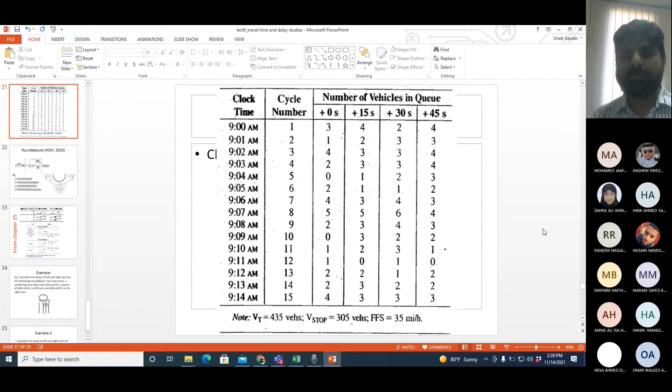Now we will move to the topic which we were covering, which was delay studies. Okay, so we discussed the procedure and the equations for doing a delay study on a traffic signal. I showed you the equations and the procedure. Today we will do some examples and I will show you the procedure for calculating delay for roundabouts as well.

So you see this is an example, data taken from a delay study of a signal. So the study started at 5 p.m. and it continued for 10 minutes. Observer one was counting the number of vehicles in the queue after every 20 seconds. So you can see after every 20 seconds we have an observation.

The cycle length for this intersection, the time from the start of the red to the start of the next red, is 60 seconds. So that's why you see 0, 20, and then 40, and then after 40, what happens? New cycle begins. So after 40, when you complete the next 20 seconds, you have completed 60 seconds, right? So at 60 seconds, you are at the start of the second cycle.

So that's why you see the values up till 40, because after 40, the next one is the beginning of the new cycle. And you can see every row marks the beginning of a new cycle. So the value is taken in the first cycle, second cycle, third cycle, and so on. Each cycle is 60 seconds, means 1 minute, and we have collected data for 10 cycles. So that means 10 minutes. These observations came from observer 1.

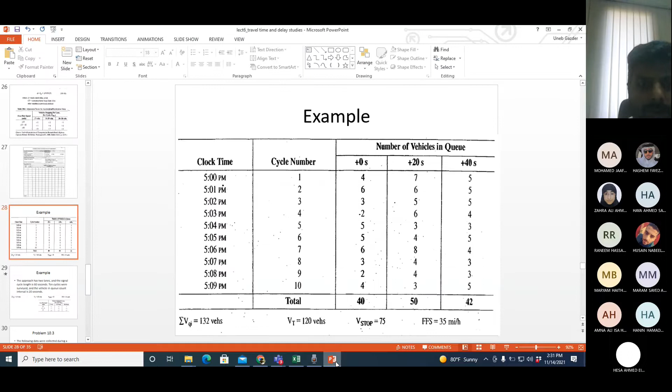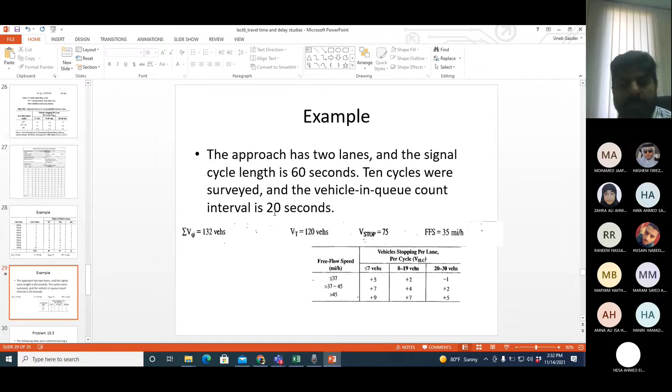So first of all, let me read the statement of the question as well. This approach has 2 lanes. Cycle length is 60 seconds. I already told you. Data taken for 10 cycles. This is already also clear. And each vehicle in queue count was taken after 20 seconds. So all these things are very clear from the table. The only new thing is that we have done the study for 2 lanes.

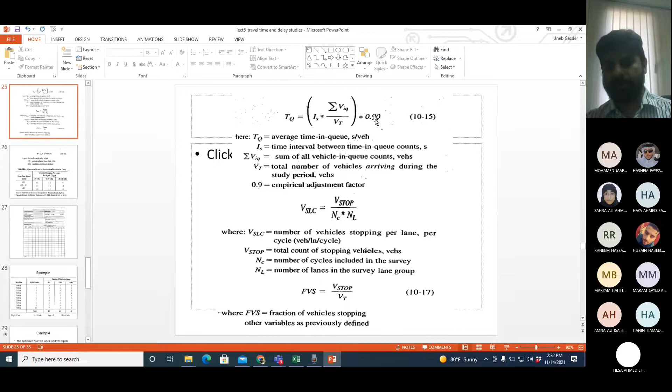The first thing we need to calculate is TQ, time in queue delay. So in time in queue delay, I'll show you the equation. This is the equation. IS is the interval for the first observer, 20 seconds. Summation VIQ already done, 132 vehicles. Total number of vehicles given by observer 2, 120, and 0.9 is the constant. So 20 into 132 divided by 120 vehicles. TQ, time in queue delay.

If you have any questions, you can ask. Okay. Don't have any questions? Calculate the values. How much is TQ, time in queue delay? 19.8. Okay. The units are seconds per vehicle. Each vehicle is spending on average 19.8 seconds in the queue.

Then the next thing we calculate is VSLC, vehicles stopped per lane per cycle. Observer 2 gave me that 75 vehicles stopped. There are 2 lanes on this highway and the data is collected for 10 cycles. So how much is this? 3.75. Per lane per cycle. Then we calculate fraction of vehicles stopped, which is vehicles stopped upon total number of vehicles. How much is that? 0.625.

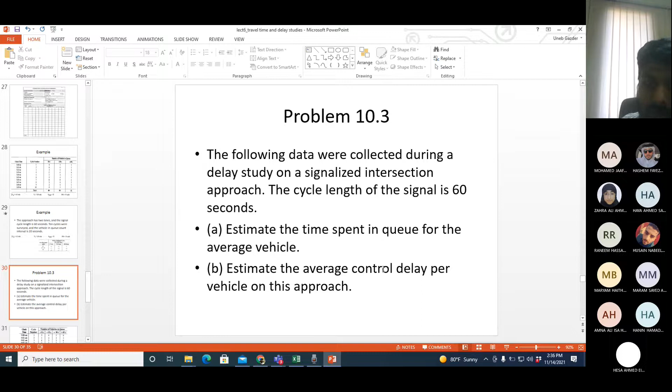Moving on, there's another example as well. So this is the statement: signal cycle length is given 60 seconds. Find out time in queue delay TQ and the average control delay, which is D. So this is the same. Number of lanes are not given, so I will assume it to be 1. This is the data. Signal cycle length is 60 seconds and they have collected data for 15 cycles. That means 15 minutes, each cycle was 1 minute.

Then you see the values are taken after every 15 seconds. So the interval for the first observer was 15 seconds. So 0, 15, 30 and 45, because after 45 you will go to the next cycle. 45 plus 15 is 60, so that is the start of the next cycle. Values given by observer 2, total number of vehicles arrived 435. Out of 435, 305 stopped. Free flow speed taken before the study, 35 miles per hour.

So I will start with the time in queue delay first of all. I need total number of vehicles given, interval for the first observer, 15 seconds, and summation of VIQ. Summation of VIQ means sum all the values of these 4 columns, for 0, 15, 30 and 45. You can do the summation for all of them and give me one value, or do it column by column, no problem. Just give me the total of all the counts taken by observer 1. How much is that?

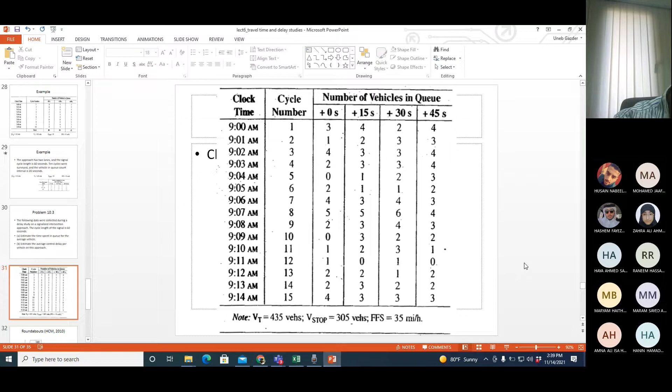Yes, anyone? 151. Yeah, too much. What can I do? So we know the interval 15 seconds multiplied by summation of VIQ 151 divided by total number of vehicles 435, multiplied by 0.9, a constant. So how much is TQ? Give me the value of TQ.

4.69. Then I can calculate VSLC, which is number of vehicles stopped 305 divided by number of lanes 1, which I assume, and 15 cycles. How much is VSLC? 20.33. Then I will calculate FVS, which is number of vehicles stopped divided by total. How much is this? This is vehicles per lane per cycle, and this is 0.701. So now I can calculate control delay.

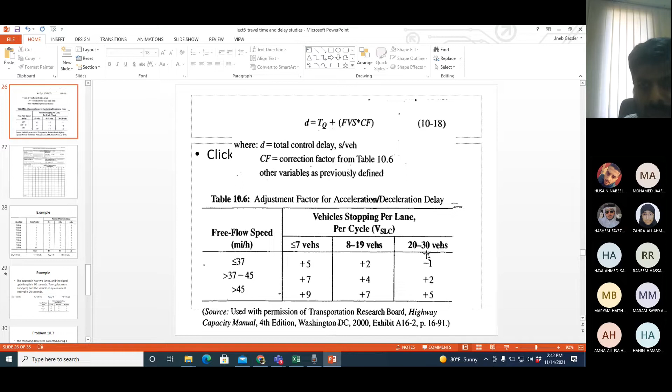So 4.69 plus 0.701 multiplied by the correction factor. For the correction factor, again this table. Free flow speed is still 35 and VSLC is 20.3, so in this range. You see the correction factor is negative. And what effect will it have? I will tell you once we calculate the value. So what is D here?

.98 or 3.99, in seconds per vehicle. Now, if you remember, I told you time in queue delay is part of control delay. So time in queue delay should be lower and control delay should be higher. But you can see in this question, it's the other way around: time in queue is higher, control delay is lower.

Why? It could be because the queue is moving slowly, because of the design of the road, or because the number of lanes are not enough. So the queue is moving slowly. Since the queue is moving slowly, more delay is caused by the queue than would have been caused by the signal. If the queue was moving fast, the signal would have caused less delay. So this is the meaning here.

So when time in queue delay is higher, that means there is a problem with the design of the road or maybe the number of lanes, because of which the queue is causing more delay than the design of the signal would cause. But usually in most of the cases, D should be higher than TQ.

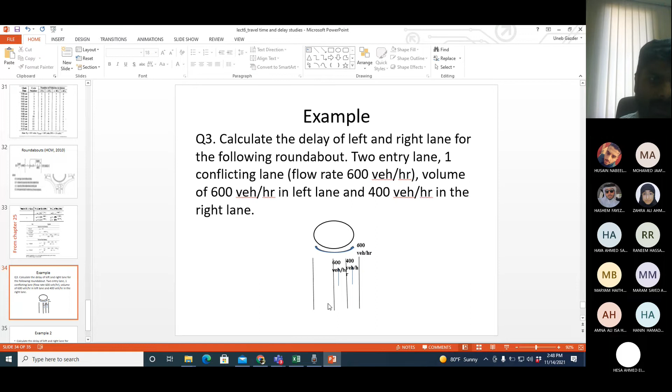So first of all, I should calculate the capacity of this roundabout. For capacity, I have 2 entry lanes, but 1 lane of the roundabout. So I will be using these equations. Now in this condition, you can see CR and CL have the same equation. There is no difference between them. So capacity of both lanes will be equal. Okay, so let us calculate the capacity first.

Capacity is 1130 times e to the power, e means exponential, minus 0.001 into conflicting flow rate, which is 600. Give me this value. This is exponential. Don't ask me from where did you get the value of e. 620.16. Okay. So you take 620.

Then I can calculate x for the left lane, which is 600 upon 620, volume upon capacity. And then I can calculate x for the right lane as well, which is 400 upon 620. In this case, remember, both lanes have equal capacity. In some other case, it might not be the case.

For number of vehicles rounding, we should round up or just normal rounding? So normal rounding off. Okay, thank you.

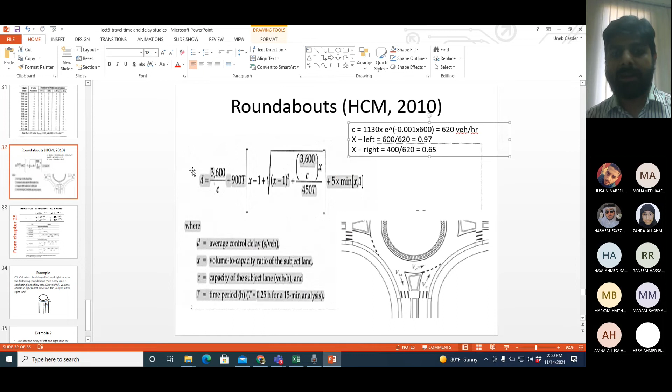So this is for the left lane, and for the right lane, 0.65. Very good. Now I will take these values here because the equation is very long. So you will use this equation. Capacity for both lanes equals 620. So C is similar, but X is different for each lane. So you will calculate delay differently for each lane. Capacity is the same, delay is not the same. So give me the delay for left lane and right lane.

These are the values. And T, as I said, 0.25, because 15 minutes analysis period for any hour. And in this case, you don't have to multiply 5 by 1 because both x values are less than 1. So 5 will multiply by x every time. So what is the delay for left lane and right lane?

So while you people are calculating, if anyone has a question, a comment, any query, they can ask me. Any questions, queries, problems, please go ahead. Otherwise, calculate the values. So like I said, there's an extra example given in the slides about roundabouts. So you can solve that as well. And if you face any problem, let me know.

54.7, yes. So D for the left lane, 54.7 seconds per vehicle, okay? Delay caused because of roundabout to each vehicle. The right lane, just need to change the value of x.

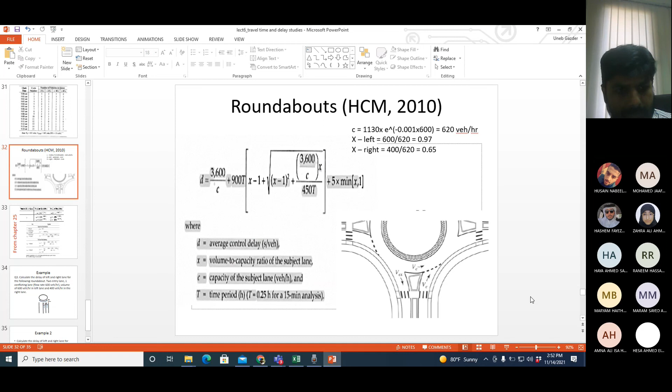19.2, okay. So you can see the flow in the right hand side lane is less. So X value is also smaller, and the delay is also less. So whenever the flow is less, the delay will be less. Yeah, seconds per vehicle. Thank you.